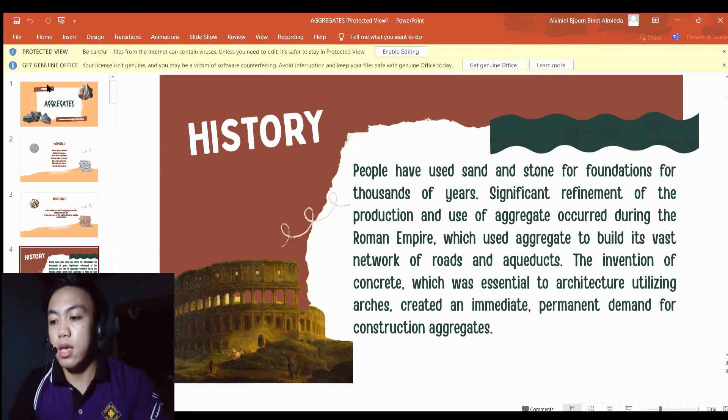Aggregates have been around since before humans walked the earth, formed in the fires of volcanoes and molded by erosion, time, water, and glaciers. The Romans were excellent engineers and used rock and concrete in almost everything they built, from aqueducts and bridges to roads and buildings that are still standing today. In almost every country in the world, you can find ancient structures that used some form of aggregates.

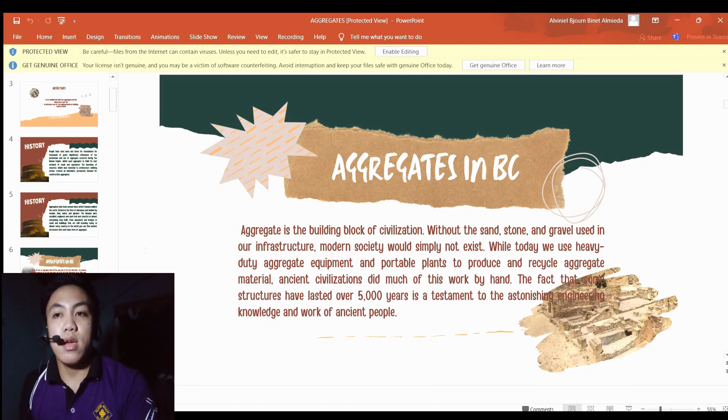Early signs of aggregate use. Some of the earliest signs of aggregate in use are from Mesopotamia around 3000 BCE. Ancient Mesopotamians built houses made of strong stone with simple concrete floors and even underground waterproof systems. This was one of the reasons they were able to thrive in the hot desert climate. Some of these structures have survived to these days.

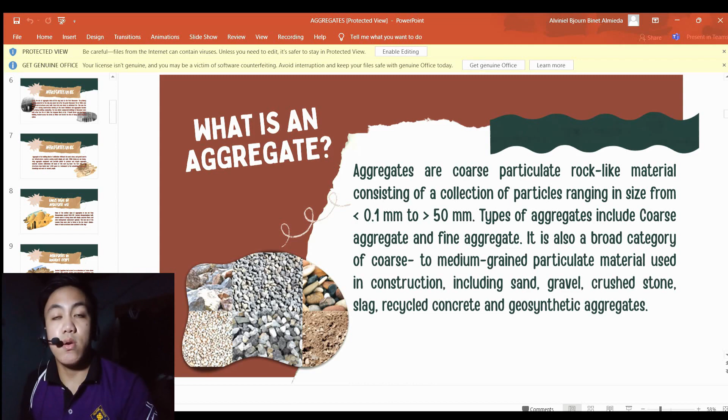Aggregates are a component of composite materials such as concrete and asphalt. The aggregate serves as the reinforcement to add strength to the overall composite material, along with the water and Portland cement that are essential ingredients in concrete.

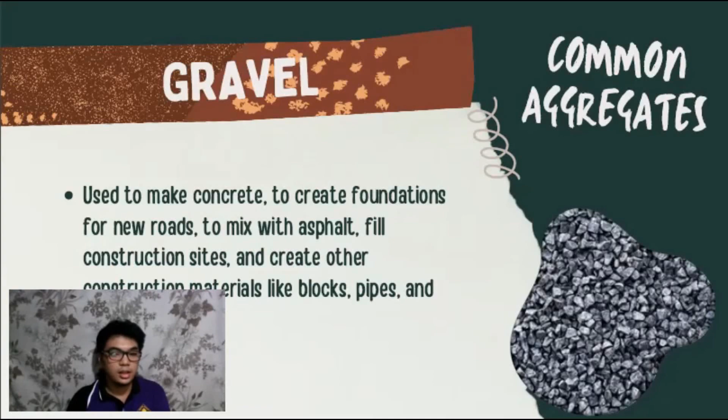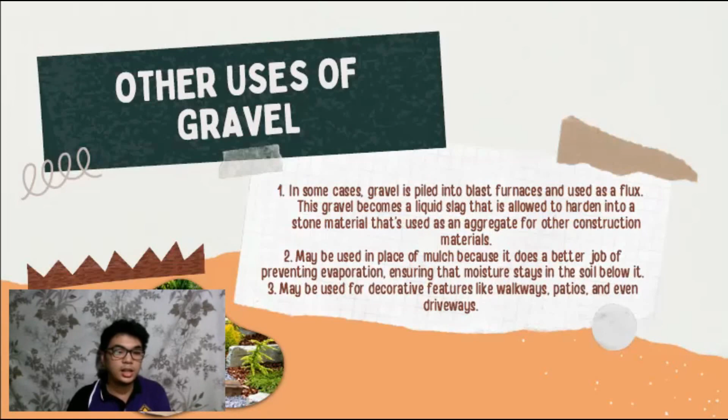So, other uses for gravel: minsan ang gravel ay tinutunaw tapos papatigasin uli, yun yung gagamitin na aggregate sa construction. Pwede din na yung nilalatag sa lupa kasi nakukulong niya yung moisture sa ilalim niya, o minsan pampaganda lang talaga ng bakuran. Tapos sunod naman ay buhangin.

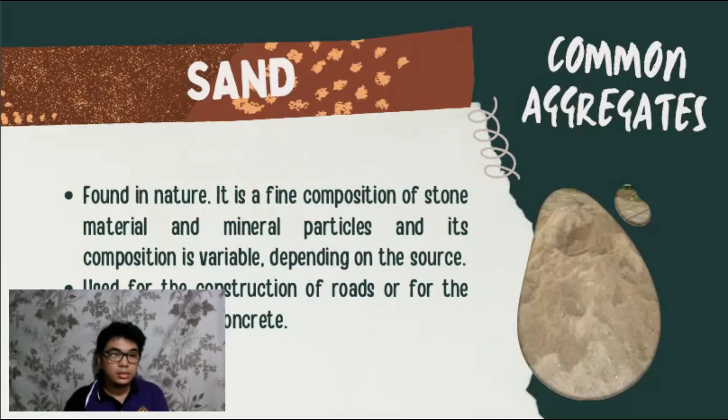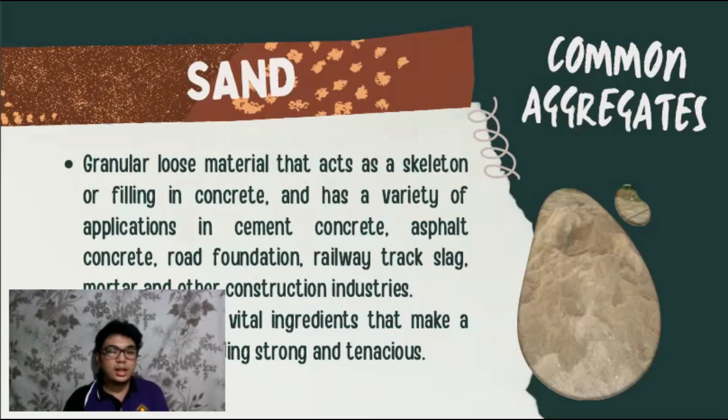Ang buhangin, makikita natin siya sa paligid. Gawa siya sa mga maliliit na bato-bato dun sa lugar kung saan siya na-form. Ginagamit siya sa construction at paggawa ng concrete. Isa siya sa mga pinakamahalagang bagay sa construction, pwede gamitin sa kung ano-anong klaseng mga project. Siya din daw ay nag-a-act as skeleton o filling ng concrete.

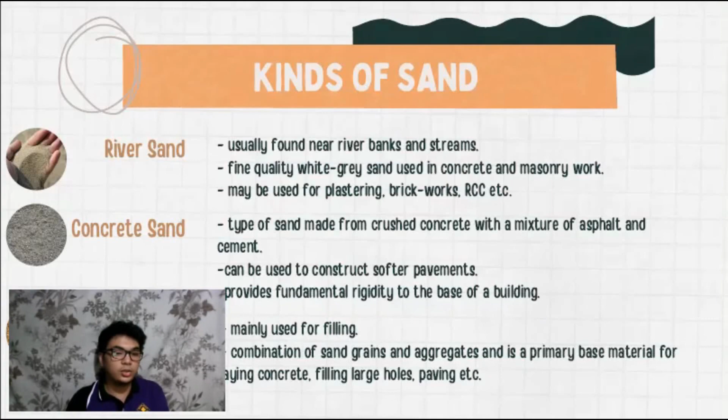Tapos fill sand, yung combination siya ng mga fine aggregates, mga bato o lupa na dinurog hanggang maging pino. Tapos yung coarse sand naman, yung buhangin na medyo may kalakihan kumpara sa ibang mga kinds ng sand, yung size ng grains niya. Utility sand, yun yung parang iba-iba yung kulay ng grains, tapos medyo may kalakihan din yung size ng grains niya.

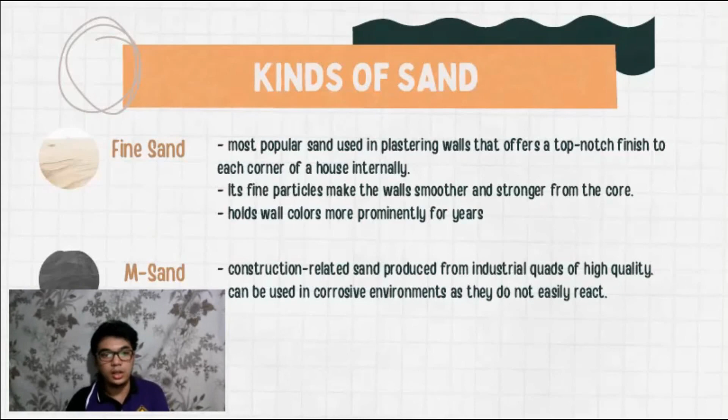Tapos pit sand naman, madalas ginagamit sa building kasi maganda yung binding property niya, red-orange yung kulay niya. Tapos fine sand, ginagamit siya sa pangpalitada kasi sobrang pino ng grains niya, nagiging sobrang smooth ng surface, gano'n. Tapos M sand, ibig sabihin lang yan ay manufactured sand, yun, galing sa mga factory, gano'n.

Tapos sunod naman, lightweight aggregates. Ito naman, nasa pangalan na niya, yung mga aggregate na mas magaan pa kaysa sa ibang mga aggregates, gano'n. Pero di naman ibig sabihin nun, di na ganun katibay yung mga gawa sa LWA, kasi ang LWA ay ginagamit pang gawa ng mga high strength concretes.

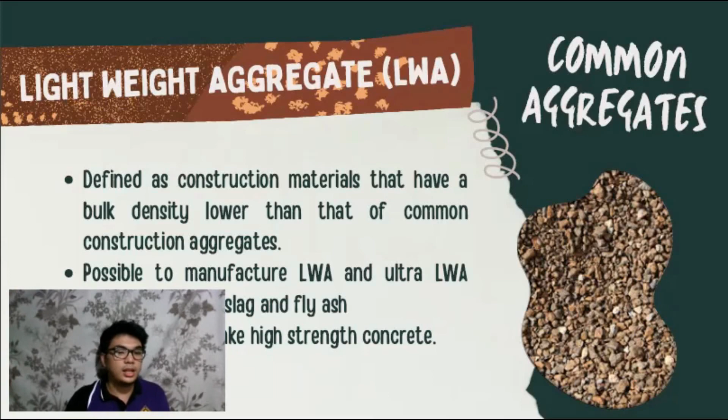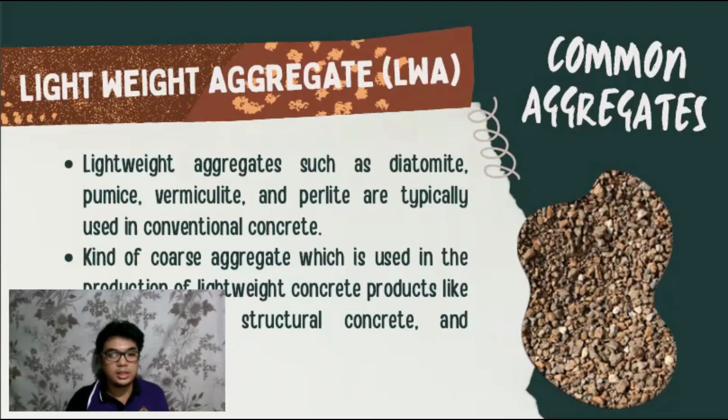Tapos merong mga natural aggregate na magaan talaga, pero pwede mo din siya gawin mula sa slag o kaya fly ash. Tapos ginagamit syempre sa paggawa ng lightweight concrete products. Tapos kalimitang ginagamit na LWA ay diatomite, pumice, vermiculite at saka perlite.

Tapos ito, types of LWA. Una is industrial waste LWA, yun yung mga gawa sa fly ash, slag ball, cinder, light sand, natural. Tapos natural LWA naman is yung mga kagaya nung diatomite, pumice, vermiculite, tsaka perlite.

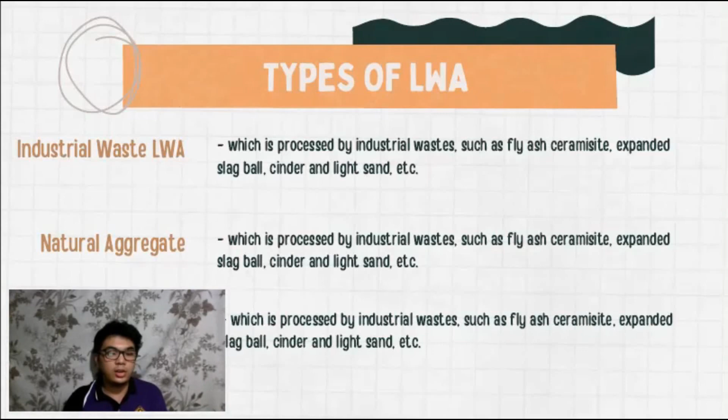Tapos artificial LWA, yun yung mga gawa sa local materials, parang mga minsan clay, ganun. Tapos sunod, recycled concrete aggregates or RCA. Ang RCA ay gawa sa mga concrete na dinurog mula sa demolition projects, mga nirecycle nga. O kaya pagka merong mga binabago sa building, tapos merong mga tinitibag, yun, dun siya gawa.

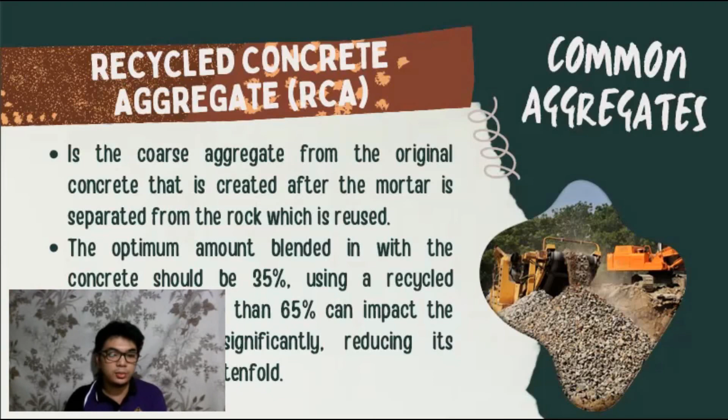Kasi, yung mga dinudurog na mga concrete sa mga dinemolish na building, sinasala pa, inaalis yung mortar, tapos yung mga bato na makukuha nila, yun yung pwedeng gawing RCA. Tapos ang pinaka-optimal lang daw na ilagay na RCA sa mixture ay 35%. Pag lumabas kasi sa 65% yung volume ng RCA sa mixture mo, pwede magpahina ng sobra sa concrete.

Tapos ayun, sunod naman, benefits ng RCA. Syempre dahil recycled, mas pinapamura niya yung cost ng construction. Tapos mas papababa niya yung environmental impact kasi di na nga natin kailangang itapon kung saan man yung mga natibag nating concrete. Tapos dahil doon, mas mape-preserve natin yung mga natural resources, mas makatipid tayo. Mas makabawas din sa space na gagamitin para sa landfill.

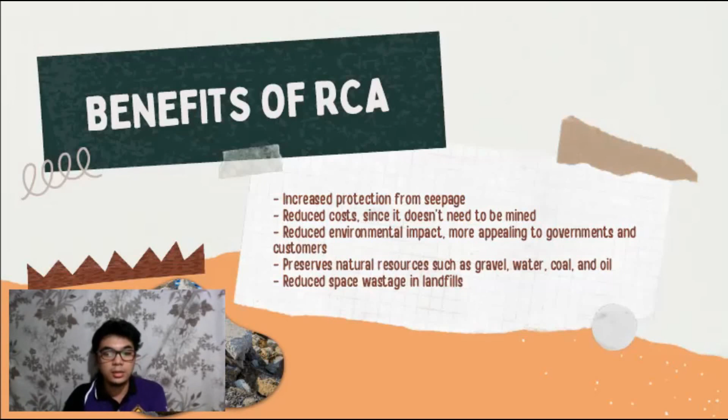Tapos yung risks naman, gaya na sabi kanina, kapag sumobra ang gamit natin ng RCA, pwedeng makabawas sa structural integrity. Magkakaroon siya ng cracks agad, ganon. Tapos di din siya, dapat lagi din siya nire-refine, kasi pwedeng yung mga ma-recycle natin, mga brittle na aggregate, magkakaroon yun ng uneven grading pag ganon.

Tapos kailangan din daw, pag gagamit ng RCA, dadagdagan pa ng supplement yung mix para maging kasing tibay siya ng parang gumamit ka lang ng normal na aggregate. Tapos syempre, pag nagre-refine, kailangan mong bantayan yun para sure ka na yung mga magagamit na RCA ay okay, ganun.

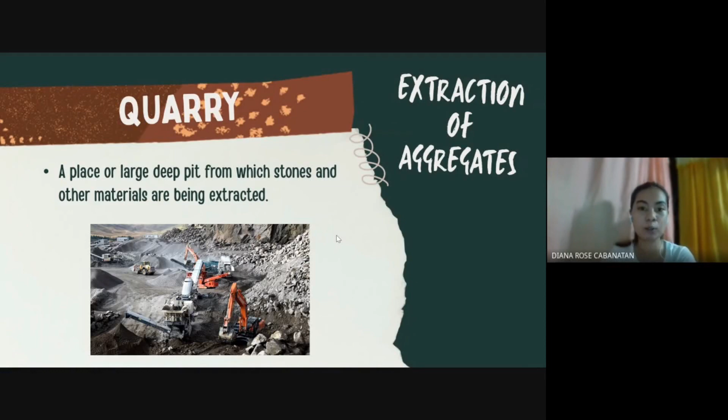Bago ko simulan yung pagre-report, kailangan muna natin i-define kung ano nga ba yung quarry. It is a place or large deep pit from which stones and other materials are being extracted. So ayun, yung mga aggregates nga, yung mga bato, yung mga sand and gravel, sa quarry nga daw po nakukuha yun. Next, how a rock quarry works.

Dito malalaman natin kung paano kinukuha yung mga rocks tapos kung anong process nila.

Rock quarries usually operate for at least 30 years and are developed in distinct benches or steps. A controlled explosion is normally used to release the rock from the working face. It is then transported by truck or conveyor to a crusher, where it goes through a series of crushing and screening stages to produce a range of final sizes to suit customers' needs.

Sa rock quarries, nagpapasabog sila ng controlled lang naman para magkapira-piraso yung mga rocks. Sa rock quarries kasi yung place niya puro bato-bato, yung mga malalaking bato, kaya kailangan nilang magpasabog para maging mas pira-piraso yung mga rocks.

Tapos, yung excavator, hinahakot nila yon tapos nilalagay sa isang truck. Tapos yung truck naman, dinedeliver nila sa planta. Tapos ilalagay sa crusher. Tapos doon na nila ini-screen, nililinis para mabenta sa market.

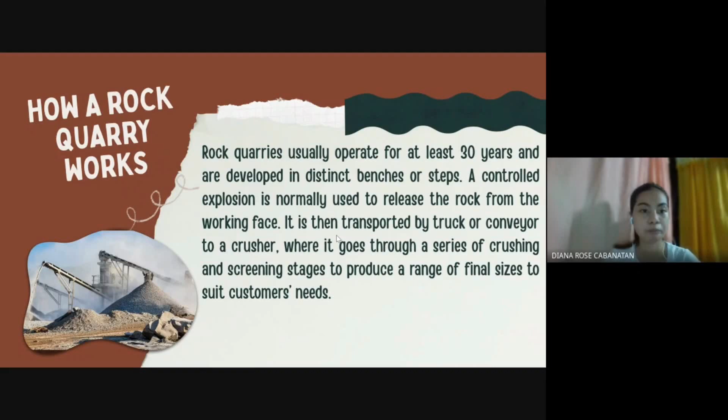Ano nga ba yung crushing? Powerful hammers or metal jaws within the primary crusher break the rock down. Rock passes through a series of screens that sift it into different sizes. It may also pass through further crushing stages. Yung pagka-crush ng rock, may 3 stages yan.

Unang stage ay yung primary crushing. Yung mga rocks doon, nire-reduce yung sizes and shape nila para ma-handle ng secondary crushing.

Sa secondary crushing naman, nire-reduce nila into standard sizes para yung mga binibenta sa market ganun. Binabawasan nila sa ganung size.

Tapos yung final reduction crushing naman, parang pinapolish na lang nila yung rock kung tama ba yung mga sizes na nakuha sa secondary crushing. Tapos dinedeliver na sa market para mabenta.

Next, kung kanina sinabi ko yung process ng rocks kung paano siya pinoproseso, dito naman aalamin natin kung paano yung pagproproseso ng sand tsaka gravel. How sand and gravel quarry works: sand and gravel quarries are much shallower than rock quarries and are usually worked and restored in progressive phases.

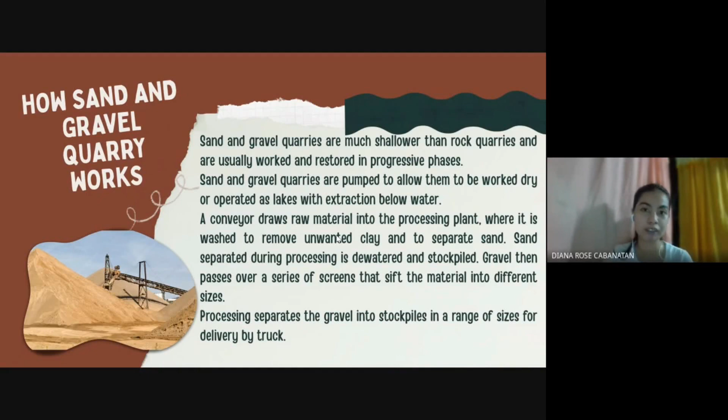Next, yung marine aggregates naman. Kung kanina, rock yung pinag-usapan natin, tapos sand and gravel quarries. Dito naman, marine aggregates. Kailangan muna natin i-define kung ano nga ba yung marine aggregates.

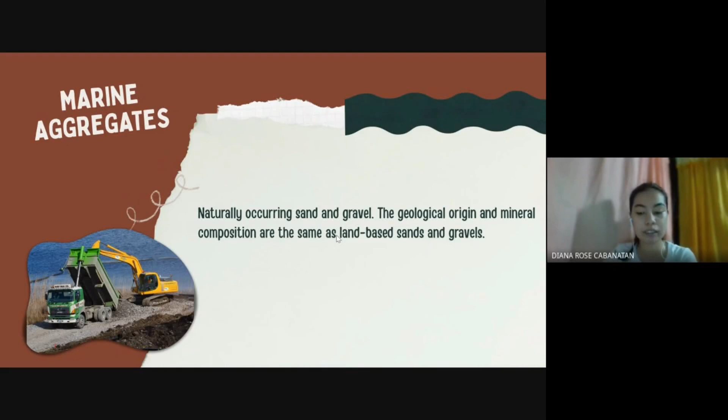Marine aggregates is naturally occurring sand and gravel. The geological origin and mineral composition are the same as land-based sand and gravel. Kapareho lang din siya ng sand and gravel na nakikita natin, sinabi ko kanina, nakikita sa seabed, sa river, sa lake.

Ano nga ba napaprocess yung marine aggregates? Saan nga ba ito nakukuha? At paano nakukuha? A significant proportion of the demand for aggregates is satisfied from river, lake, and seabeds. Our marine resources are an increasingly important alternative source of aggregates.

Marine aggregates play an important role in replenishing beaches and protecting coastline from erosion. Kanina, na-discuss ko na yung sand and gravel quarry ay madalas nasa river sila, nasa lake, nasa seabed. Ang downside kasi nun, parang nakakalbo yung mga sand doon, pumapangit yung mga beaches natin.

Tapos, pag umulan ng malakas, madalas kasi bumabaha doon.

So, nag-isip sila ng alternative para magkaroon pa ng sand and gravel. Ang naisip nila, marine aggregates. Kumukuha sila ng aggregates sa ilalim ng dagat.

Sinabi dito sa pangalawang paragraph kung paano nakukuha yung marine aggregates. Pag nasa dredging area na sila, kung saan kumukuha ng sand and gravel gamit ang satellite navigation, binababa nila yung pipe hanggang makarating sa sand ng dagat. Kapag nakarating na, magpo-forward or backward yung vessel habang hinihigop ng pipe yung sand and gravel papunta sa lalagyan ng vessel hanggang sa mapuno ito.

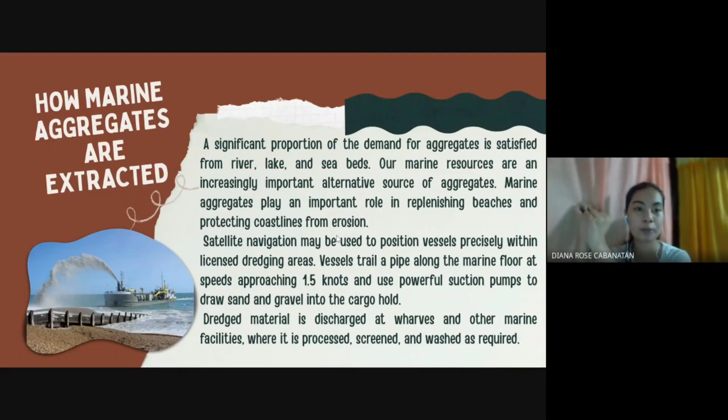This is the second part of our report. Sa first part, diniscuss yung history of aggregates, in-explain kung ano yung aggregates at yung mga common types na ginagamit, at yung extraction of aggregates. So here, sa second part, we will be discussing the classification of aggregates based on its shape and size, the properties of aggregates, and the list of test methods for concrete aggregates.

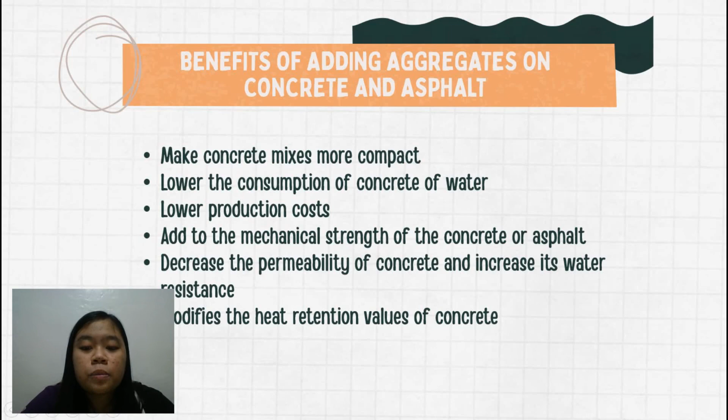Before tayo mag-proceed, padaanan muna uli natin tong benefits or importance of adding aggregates on concrete and asphalt, since na-discuss na rin naman siya sa first part. Adding aggregates on concrete and asphalt makes the concrete mixes more compact, and aggregates lower the consumption of water as well as the production cost. Aggregates add to the mechanical strength of the concrete or asphalt, decrease the permeability of concrete, increase its water resistance, and modify the heat retention values of concrete.

Classification of aggregates based on its shape. Meron tayong 6 dito: rounded aggregates, irregular or partly rounded aggregates, angular aggregates, flaky aggregates, elongated aggregates, and the last one is flaky and elongated aggregates. First one is rounded aggregates.

Rounded aggregates are naturally occurring aggregate, and they are fully water-worn or completely shaped by attrition. Kapag sinabing attrition, yung mga bato sa ilog o sa river, when they knock against each other, they break apart, and nagiging mas maliit sila and nagiging more round.

Rounded aggregates are the main factor behind the workability. Itong workability, ito yung term na ginagamit to describe how easily freshly mixed concrete can be placed or mixed, kung gaano siya kadali mahalo. Ito rin yung property na directly impacts the strength, quality, and appearance of concrete. So rounded aggregates yung main factor behind the workability.

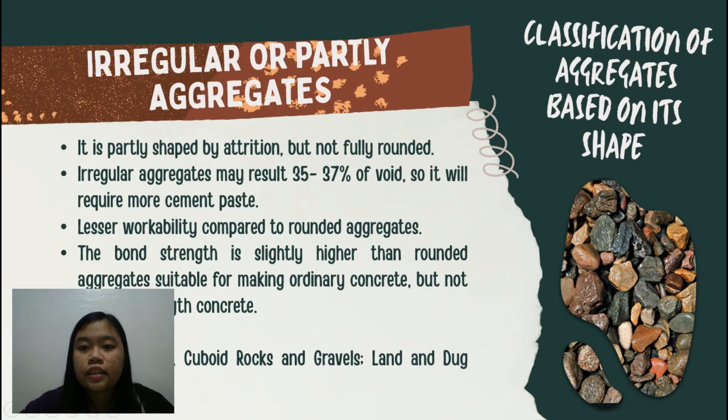Third one, angular aggregates. Angular aggregates consist of well-defined edges formed at the intersection of roughly planar surfaces. Ito yung karaniwan nating nakikita, yung may medyo matulis na mga bato-bato. Angular aggregates are obtained by crushing the rocks, unlike sa mga nauna na na-form by attrition.

Angular aggregates result in maximum percentage of voids, from 38 to 45%. Kung yung rounded aggregates ang may minimum percentage of voids, ito naman ang may maximum percentage. Siya yung nagbibigay ng less workability compared sa dalawang nauna. Pero kahit ganon, they give 10 to 20% more compressive strength due to development of stronger aggregate mortar bonds. Ito na yung ginagamit for manufacturing high-strength concrete. Example: crushed rocks of all types.

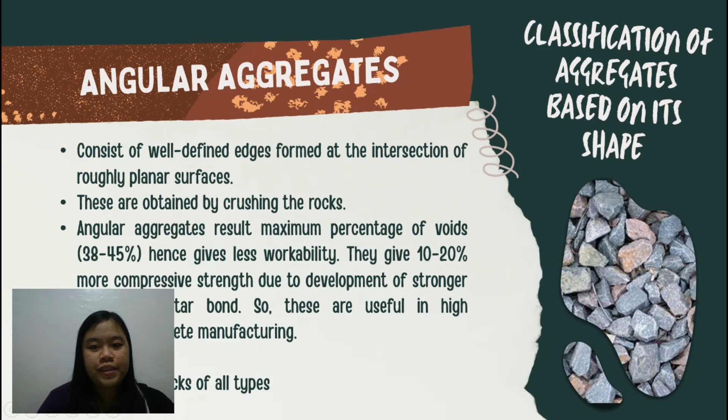Next is the flaky aggregates. When the aggregate thickness is small compared with width and length of that aggregate, it is said to be flaky aggregate. Or, when the least dimension of aggregate is less than 60% of its mean dimension, it is said to be flaky aggregates. Tawag dito sa flaky aggregates yung mas manipis siya compare sa mga naunang nabanggit. Flaky aggregates increase the surface area in a concrete mix, so magre-require siya ng more cement paste. Example: laminated rocks, both naturally occurring as well as crushed.

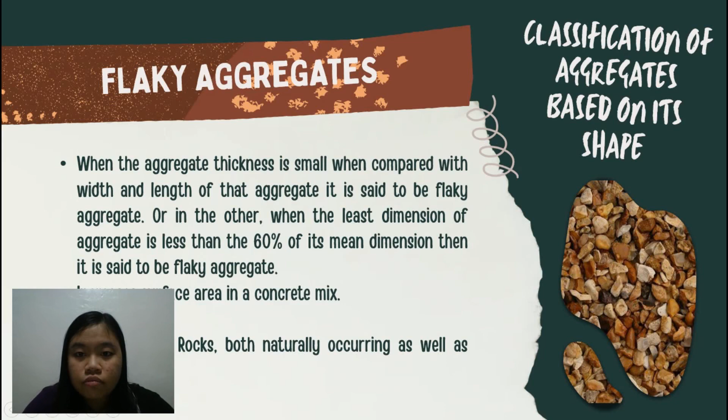So, elongated aggregates. Elongated aggregates are longer than they are thick or wide. So, when the length of aggregate is larger than the other two dimensions, then it is called elongated aggregate, or the length of aggregate is greater than 180% of its mean dimension.

So, like flaky aggregates, it also adds more surface area to the mix. So, more cement paste is needed when this is used.

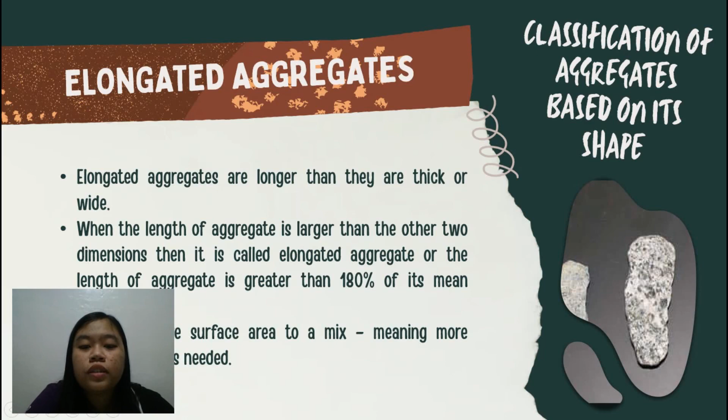So, last one, flaky and elongated aggregates. When the aggregate length is larger than its width and width is larger than its thickness, then it is said to be flaky and elongated aggregate. It's a mix of the two, a mix of the previous two, and it is the least efficient form of aggregate with regards to workability.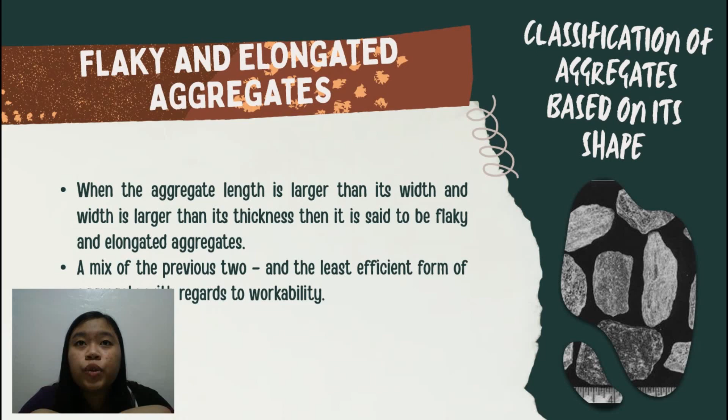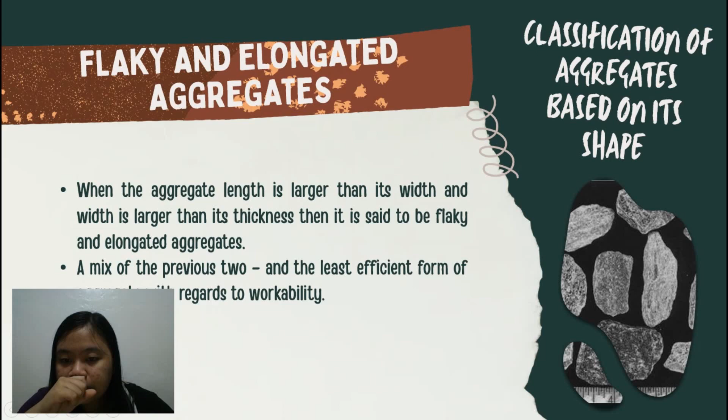So, because of that, the bond between them is stronger compared to rounded aggregate, but the percentage of void is higher. The above three types of aggregates are not suitable for concrete mixing. These are generally obtained from poorly crushed rocks.

The shape and texture of aggregate affects the properties of fresh concrete more than hardened concrete. So, concrete is more workable when smooth and rounded aggregate is used instead of rough, angular, or elongated aggregate. So, smooth and rounded aggregates have higher workability compared to rough, angular, or elongated aggregate.

Most natural sands and gravel from riverbeds or seashores are smooth and rounded and are excellent aggregates. Crushed stone produces much more angular and elongated aggregates, which have a higher surface to volume ratio, giving better bond characteristics but requiring more cement paste to produce a workable mixture.

The surface texture of aggregate can be either smooth or rough. A smooth surface can improve the workability, as mentioned earlier, and yet a rougher surface generates a stronger bond between the paste and the aggregate, creating a higher strength.

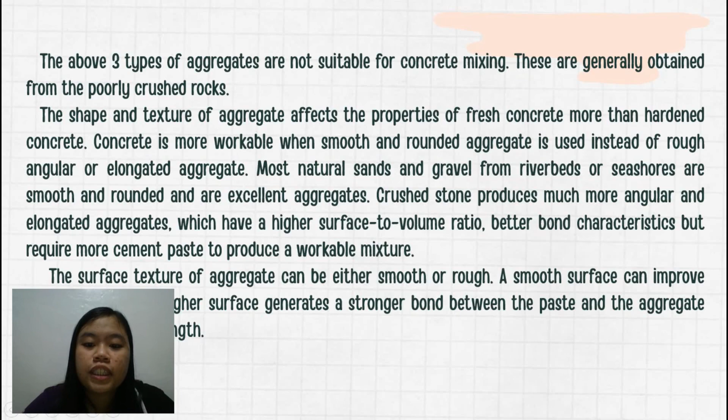So, next is the classification of aggregates based on its size. This will be presented by Ben Joshua Mercado. Thank you.

Good morning. I am Ben Joshua Mercado. I will be reporting on the classification of aggregates based on its size. Aggregates are available in nature in different sizes. The size of aggregate used may be related to the mix proportions, type of work, and etc. The size distribution of aggregate is called grading of aggregates.

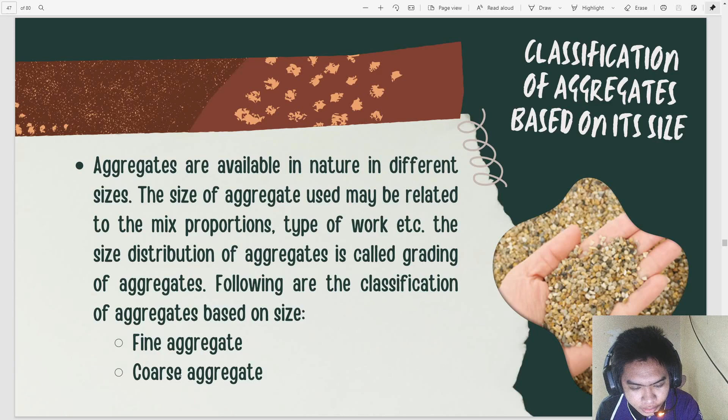Following are the classification of aggregates based on size. Fine aggregate, we call it sand, the small particles of materials. And then coarse aggregate, this is stone.

Next is the scope of fine aggregates and coarse aggregates. Definition of fine aggregate: small size filler materials in construction. Coarse aggregate: larger size filler materials in construction. Size of particles of fine aggregates are the particles that pass through a 4.75 mm sieve and retain on a 0.075 mm sieve. This is how big the hole of the sieve is, 4.75.

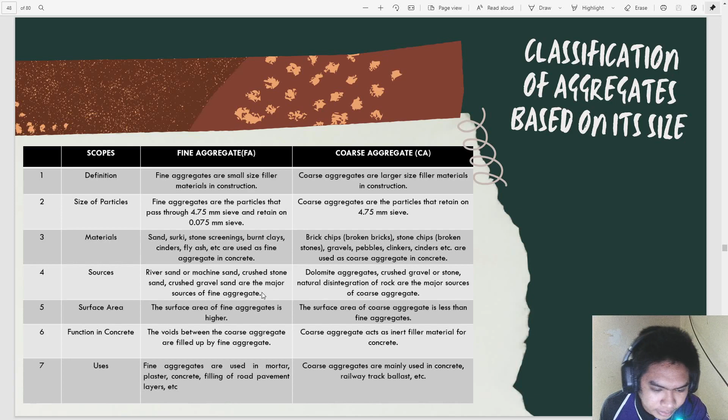Surface area ng fine aggregate is higher kaysa sa coarse aggregate. Function ng fine aggregate sa concrete, voids between the coarse aggregate are filled by fine aggregates. And then coarse aggregate acts as inert filler material for concrete.

Uses naman nito, fine aggregate are used in mortar, plaster, concrete, filling of road, pavement, layer, etc. And sa coarse aggregate are mainly used in concrete, railway track ballast, and etc.

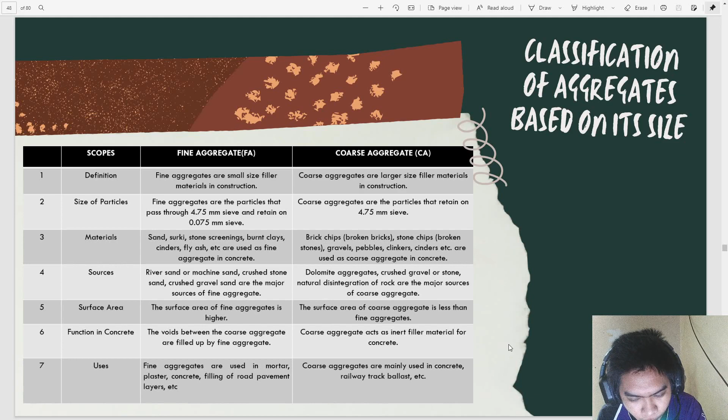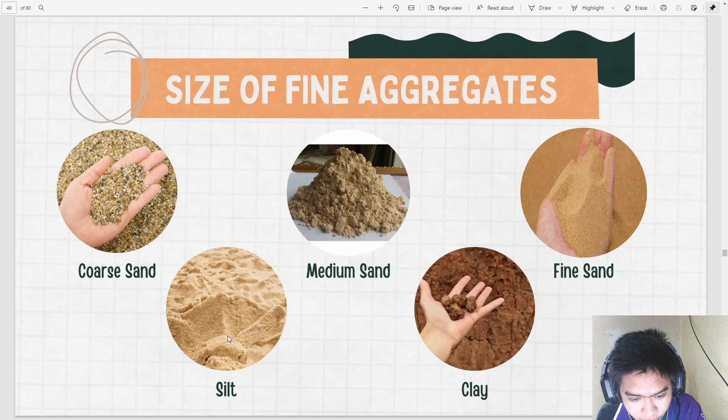Next, makikita natin ang size of fine aggregates. Coarse sand, ganito kalalaki yung butil, parang bigas. And then medium sand, and then fine sand na mas maliliit kaysa dun sa medium. And then next yung silt, at saka yung clay.

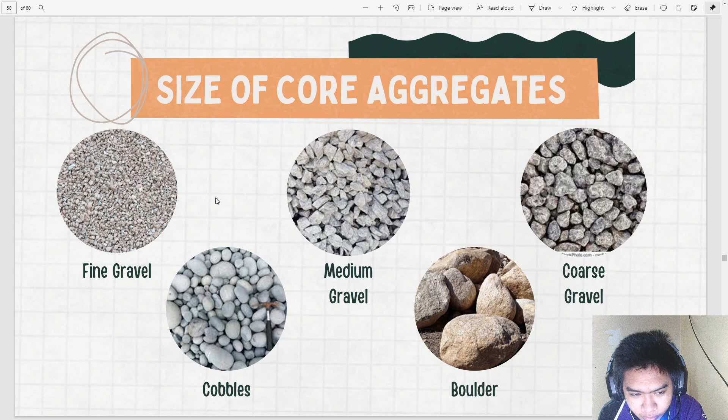Next, properties of aggregates. The aggregates are used as important ingredient in the preparation of concrete. The fine aggregates are used in concrete as fillers, and the coarse aggregate gives the compressive strength to concrete.

Makikita nga natin ang fine aggregates na ginagamit sa concrete as filler, and then coarse naman nagbibigay ng compressive strength to concrete. But there are properties or characteristics of aggregate which influence the properties of resulting concrete mix.

First, specific gravity. The specific gravity of aggregate is calculated by ratio between the weight of aggregates to the weight of water, which equals to aggregate weight. The high specific gravity of aggregate contains good quality, and at the same time low specific gravity aggregates are weak and permeable.

Normally, the specific gravity value of aggregate lies between 2 to 3, which is used in construction works. The specific gravity value shows the quality and the strength of the materials. Ang value nito ay nagpapakita ng quality and strength of the materials.

Makikita dito sa picture na ito yung formula ng specific gravity. May ASTM bulk specific gravity, SSD bulk specific gravity, at apparent specific gravity.

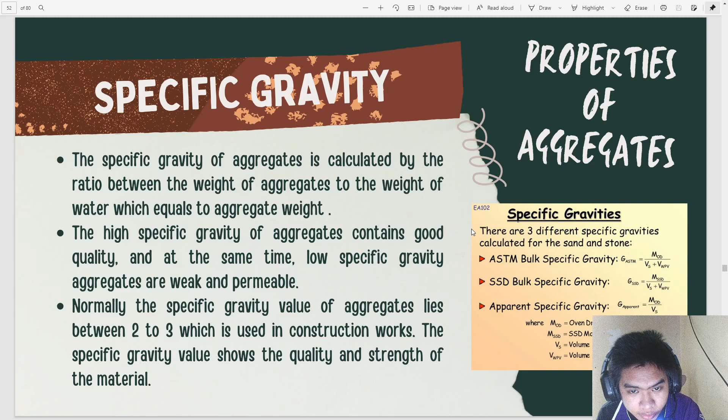Next, bulkage of aggregates. Volume of aggregates will change when it's subjected to moisture, called bulkage. When the moisture content is present in the sand, it forms a thin film around each particle that makes adjacent particles push a little way from them. This change makes the overall volume of the sand increase.

The bulking of sand is in the range between 20% to 30%. For the coarse aggregate, it is minimal. Bulk density is the ratio between dry weight of aggregates to saturated weight of aggregates in kilogram per liter.

Makikita nga natin dito sa pagkakaroon ng moisture, sa bulking ng sand ay nag-range siya sa 20 to 30%, at sa coarse naman, coarse aggregate is minimal.

Sample nito yung buhangin. Pag nalagyan ng tubig, makikita natin na mamasa-masa, parang lumalaki yung volume ng sand. At sa coarse aggregate naman, hindi naman siya permeable katulad ng bato na pag nilagyan ng tubig, hindi lumalaki yung size ng stone.

And then the bulk density of aggregate is dependent on the compaction grading of aggregates in concrete. Kaya makikita nga natin dito sa picture, sa table na ito, yung pag-decrease ng volume of sand at yung pagtaas ng moisture content of the sand.

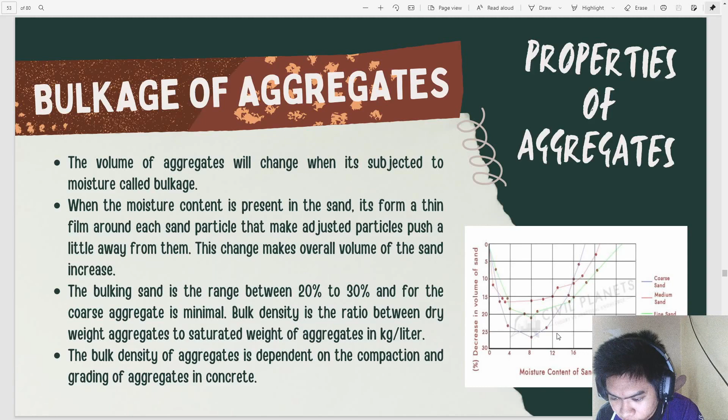Makikita natin dito yung tatlong klase ng fine aggregates na nasa graph. And next, voids.

The presence of space between aggregate particles is called void. The saturated aggregates volume will change due to the presence of voids. Dito makikita natin sa picture yung voids nga daw, ito yung spaces between aggregates.

Makikita natin dito sa poorly graded, malalaking spaces siya, walang nakalagay. Dito naman sa well graded, may mga maliliit pang aggregates dun sa malalaki. Parang sample nito, itong malaking bilog, yung coarse aggregate.

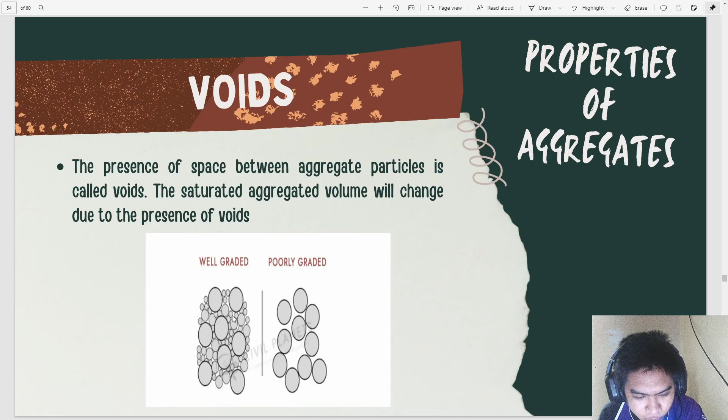At yung mga maliliit naman, ito yung mga fine aggregates na filler siya doon sa may coarse aggregate.

Next, gradation and specification ng aggregates. Gradation is the distribution of different size stone comprising aggregates by percent of weight. Gradation is determined by filtering an aggregate through successively smaller sieves and measuring the weight retained on each sieve.

Fine content, negative 200 sieve or smaller than 0.003 inches, is determined by washing the aggregates to separate these fine materials from the larger pieces.

Makikita natin dito sa picture na ito na yung malalaking parts ng coarse aggregates ay matitira sa may taas, and then yung mga fine aggregates na maliliit ay mapupunta sa baba. Bali maseseparate yung dalawang sizes ng aggregates.

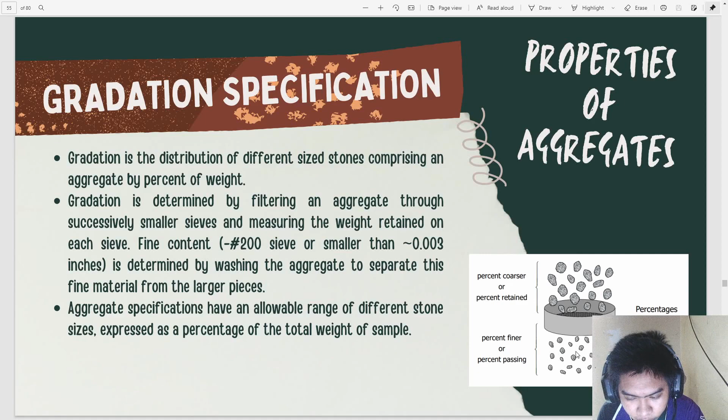So for the next property of aggregates is the composition. It is important to identify or determine the composition of the aggregate because, as we know, aggregates contain different chemical particles that may react with the cement, and this results in the formation of cracks on the concrete surface. So it is important that we test the composition of aggregate to ensure that such kinds of particles are not present in the aggregates.

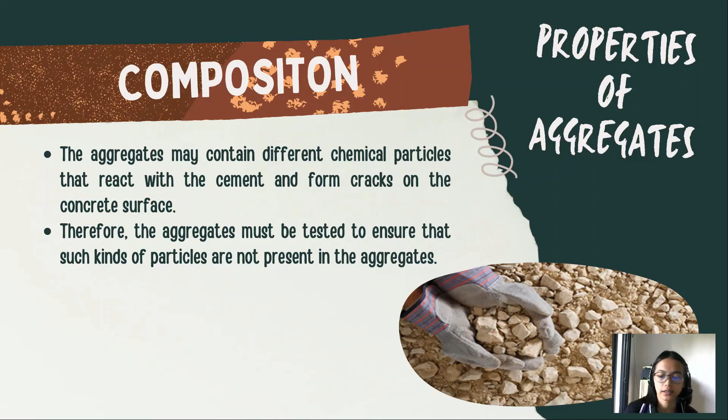Next property is size and shape. The size and shape of the aggregates impact the strength and durability of the concrete. When we use large size aggregates, this affects the workability of concrete. Therefore, the maximum aggregates that we must use should not be less than 20 millimeters in reinforced concrete. And we must use the largest coarse aggregates viable for the structure in preparation of economical concrete mix.

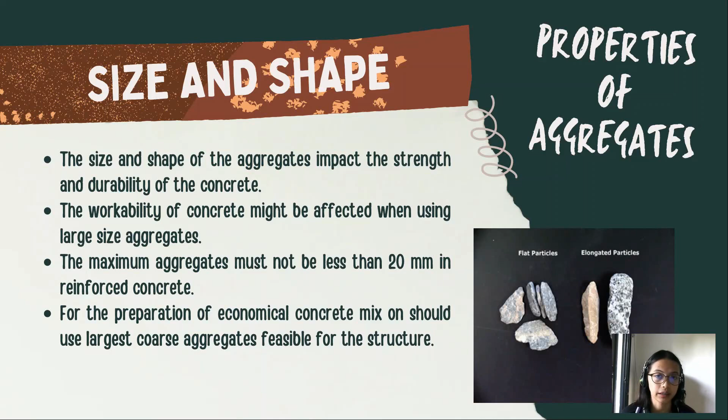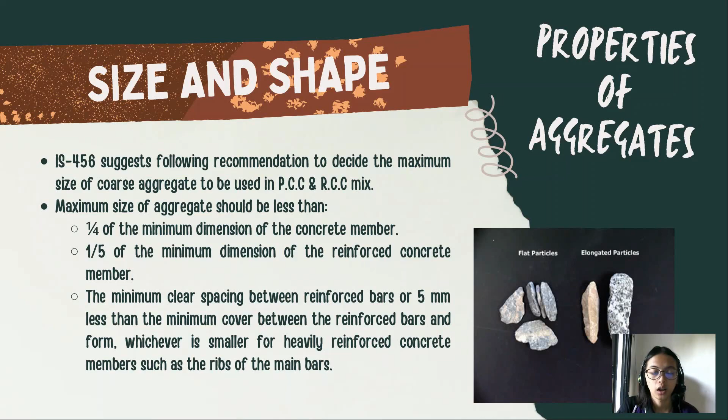Indian Standard Code suggests the following recommendation to decide the maximum size of coarse aggregate to be used in plain cement concrete and reinforced cement concrete mix. The maximum size of aggregate should be less than 1/4 of the minimum dimension of the concrete member, 1/5 of the minimum dimension of the reinforced concrete member, and the minimum clear spacing between reinforced bars, or 5 mm less than the minimum cover between the reinforced bars and form, whichever is smaller, for heavily reinforced concrete members such as the ribs of the main bars.

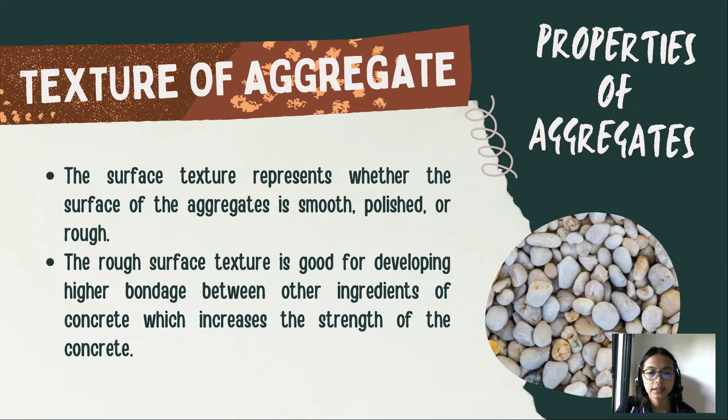Next property is the texture of the aggregate. The surface texture of the aggregate can either be smooth, polished, or rough. The rough surface texture of the aggregate is good for developing higher bonding between other ingredients of concrete, and this increases the strength of the concrete.

Next one is the porosity and absorption. Porosity is the formation of pores in the rocks. Pores form in rocks due to air bubbles, so we have porous rocks which contain pores. For water absorption, it is defined as the difference between the weight of very dry aggregates and the weight of the saturated aggregates with surface dry conditions.

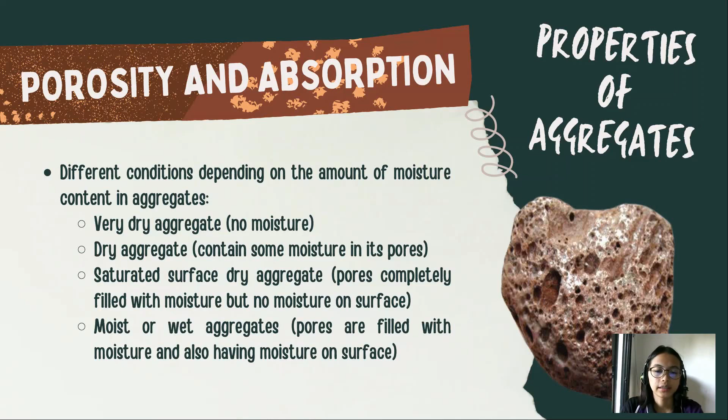We have different conditions depending on the amount of moisture content in aggregates. Number one, very dry aggregate, meaning it has no moisture at all. Number two, dry aggregate, which contains some moisture in its pores. Saturated surface dry aggregate is when the pores are completely filled with moisture, but the surface has no moisture at all. And we have moist or wet aggregates, where both pores and surface are filled with moisture.

For the fineness of aggregates, this is another property of aggregate. Fineness denotes the particle size of the aggregates. A high fineness value means the aggregate is coarser, and a low fineness value means the aggregate is finer. If we use a more fine aggregate, or the aggregate has a very high fineness value, it may form cracks on the concrete. So to test the fineness of the aggregate, we use the sieve analysis test.

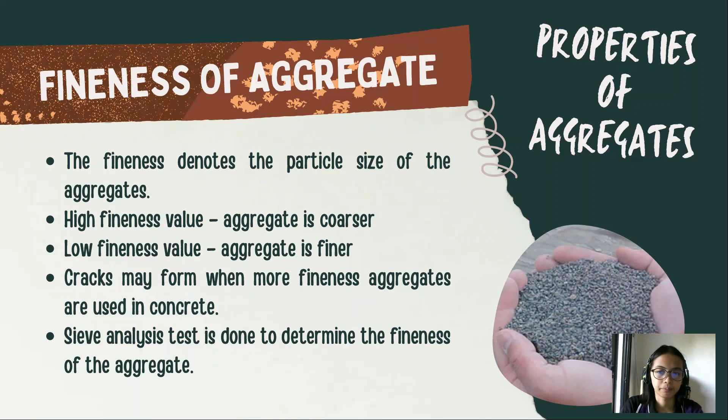And the next one is the surface area of aggregates. The surface area of fine aggregate is higher than the surface area of coarse aggregate. So the specific surface increases with the reduction in the size of aggregate particle. Specific surface area is the surface area per unit weight of the aggregate.

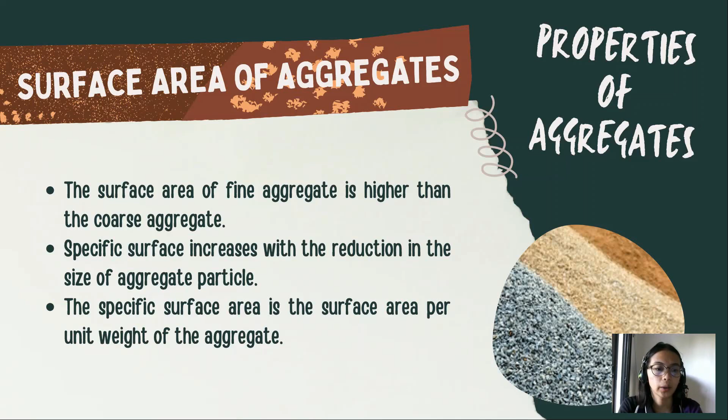Next one is the deleterious material. It affects the bondage of the concrete ingredients, resulting in reduced strength and durability of the concrete. Deleterious materials may cause one of the following effects: number 1, to interfere with hydration of cement; number 2, to prevent development of proper bond; number 3, to reduce strength and durability; and number 4, to modify setting times.

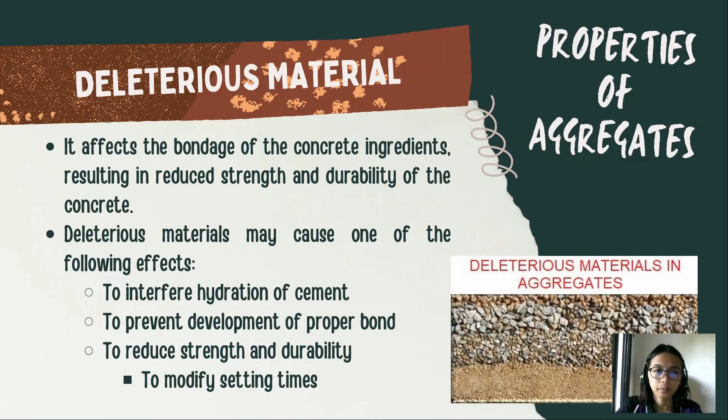Next property is the crushing value of aggregates. Crushing value of aggregates gives a relative measure of resistance of an aggregate to crushing under gradually applied compressive load. It is helpful to determine the crushing value of the aggregate to find the compressive strength of it, and it determines whether it is suitable for concrete work or not.

Next one is the impact value of aggregates. This is used to find the resistance capacity of aggregate from sudden impact applied on the aggregate. To determine the impact value of the aggregate, we use this impact machine. We put the test sample on the cylinder test cup, then a tamping rod is placed above the cylinder cup, and the tamping rod crushes the sample. So we measure the before and after weight of the sample using the weight balance.

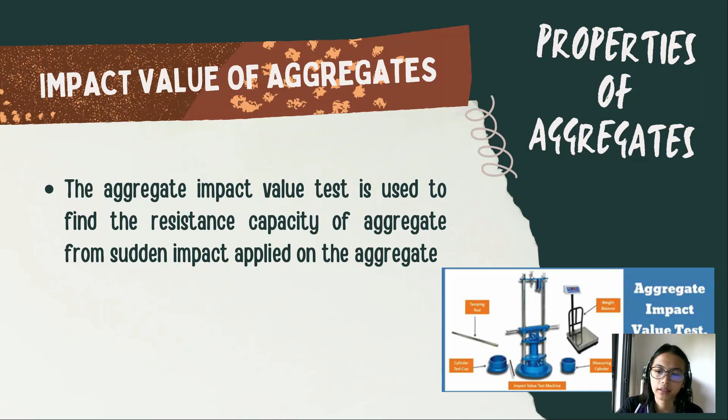Next one is the abrasion value of aggregates. Abrasion value of aggregates measures the resistance of the aggregate to wear when it is rotated in a cylinder along with the abrasive charge. As you can see here in the picture, we have the Los Angeles machine. This machine produces abrasive action using a standard steel ball, which is mixed with the aggregate and spun in a drum in a specified time and specific number of revolutions. After the procedure is done, we determine the percentage of wear of the sample aggregate due to friction with the steel balls. This value is called the Los Angeles abrasion value.

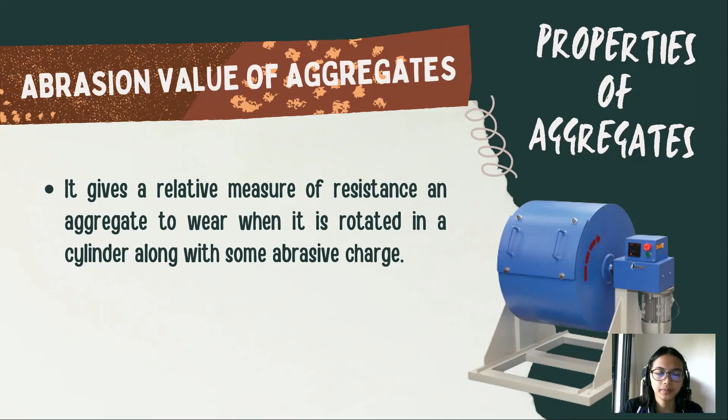List of test methods for concrete aggregates. Grading or sieve analysis: this test determines the particle size distribution of fine and coarse aggregates.

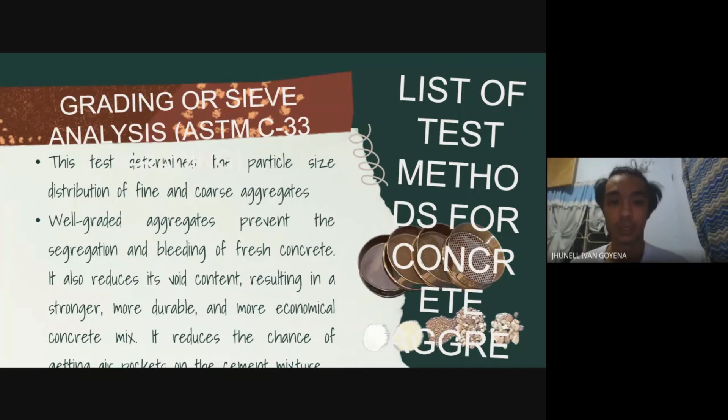Materials finer than 75 micrometer sieve. Determination of quantity of materials finer than the 75 micrometer (No. 200) sieve, which may be composed of clay particles and clay coating.

Excessive amounts of materials will result in poor bonding between aggregates and cement paste. Foreign elements may deteriorate the bond between elements present in the concrete mix. The sieve with finer texture of 75 micrometer filters out mostly clay particles or clay coatings. We know that clay, when dry, becomes very brittle and crumbles easily. If your concrete mix has clay present, as it dries, it will shrink and cause damage because the bond of the concrete mix is not good when clay particles are present in the mixture. That's why we use a fine sieve to remove those clay particles.

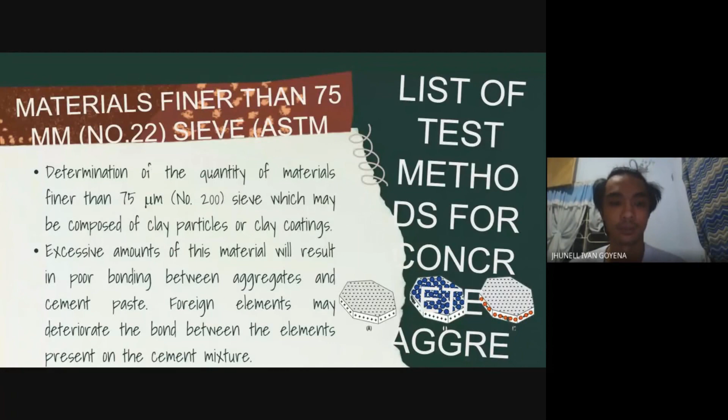Next, standard specification: for fine aggregates, 3% max for structural and pavement concrete, 5% max for all other concretes. This is the maximum amount of clay particles or clay coating allowed by standard. For example, in structural or pavement concrete, only 3% maximum clay content should be present. For manufactured sand, it's 5% and 7% respectively. Manufactured sand naturally has more clay, but since its quality is good for use in concrete mix, the clay present doesn't significantly affect it.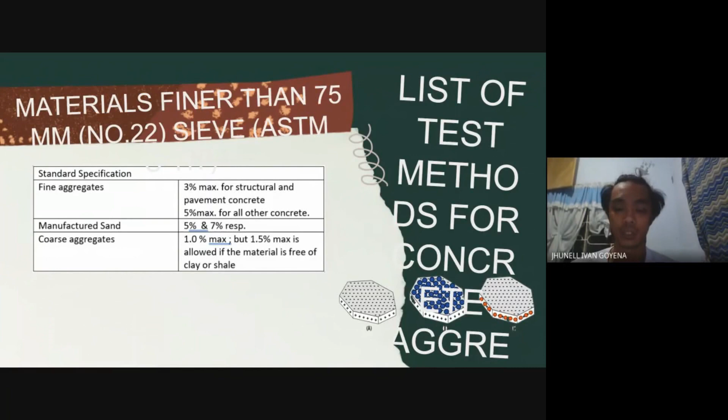For coarse aggregates, 1% maximum, but 1.5% maximum is allowed if the material is free of clay or shale. The 1% maximum clay content, or 1.5% if clay-free, applies to coarse aggregates because clay is filtered out at the 75 millimeter sieve. So the coarse sieve will drop out those particles, and they won't be included.

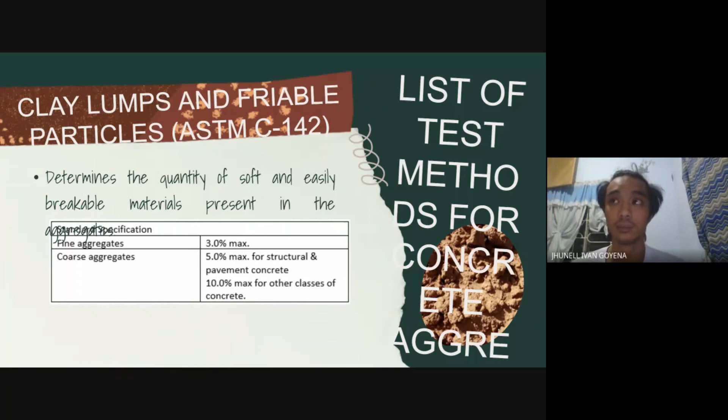For coarse aggregates, 5% max for structural pavement concrete and 10% for other classes of concrete. Similar to coarse aggregates, the clay particles are already filtered out or dropped at the next sieve, so basically the clay content gets used up, making it easier to avoid.

Abrasion loss measures the extent of degradation of coarse aggregates using the Los Angeles abrasion machine. Low abrasion loss manifests as structurally sound, tough, durable aggregates.

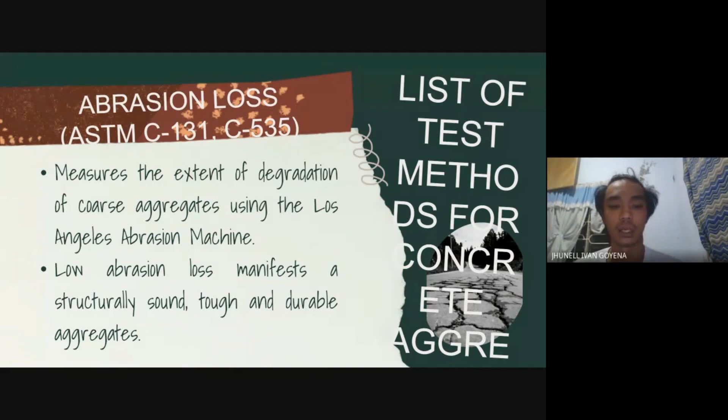Soundness loss estimates the soundness of aggregates when subjected to weathering action in concrete or other applications. Those cracks I mentioned earlier are also affected by weathering on concrete. One of the most common causes, where you'll see the biggest damage, is in snow or when temperatures drop below freezing point.

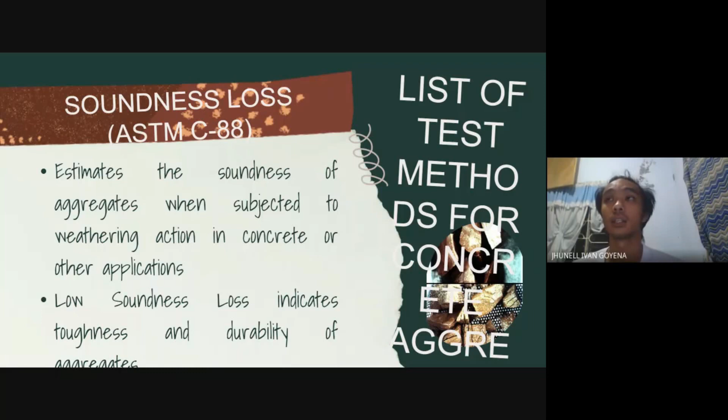Organic impurities. Determination of presence of injurious organic materials in fine aggregates used in cement, mortar, or concrete. It affects the hydration of cement, which results in low strength or low strength development of concrete.

It may contain decayed vegetation, humus, coal particles, and organic and industrial waste depending upon the source. Dito sa organic impurities, syempre hindi maiiwasan na merong, let's say, mga dahon or decayed na dahon, yung mga tuyong dahon or coal particles na masahalo doon sa cement mix mo.

So kung mayroong organic particles doon, syempre mag-iiba yung absorption ng tubig doon sa concrete mix mo. For example, pinakamagandang example is yung coal. Yung charcoal kasi is maganda siyang absorbent ng water, so kung yung water na yun, imbes na sa concrete siya mapupunta, isisihigop lang siya ng coal, parang hindi gaganda yung concrete mix mo and dun magsisimula yung iba't ibang damage.

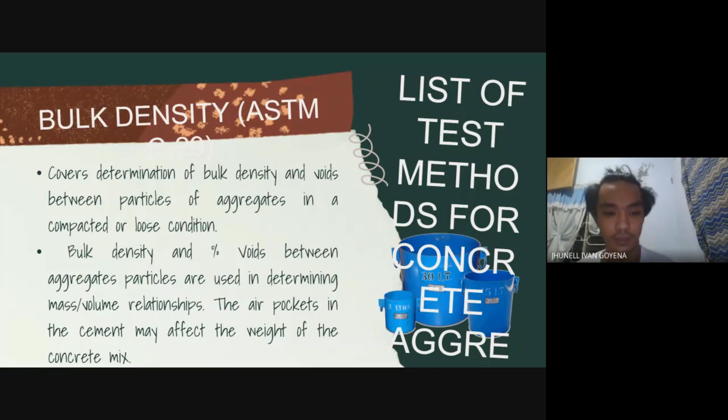So next, potential alkali reactivity. Test method for potential alkali silica reactive of aggregates. It evaluates the potential reactivity of siliceous aggregates with the alkalis in Portland cement.

Test method for potential alkali reactivity for aggregates, ASTM C1260. A means of detecting the potential aggregates intended for use of concrete undergoing...

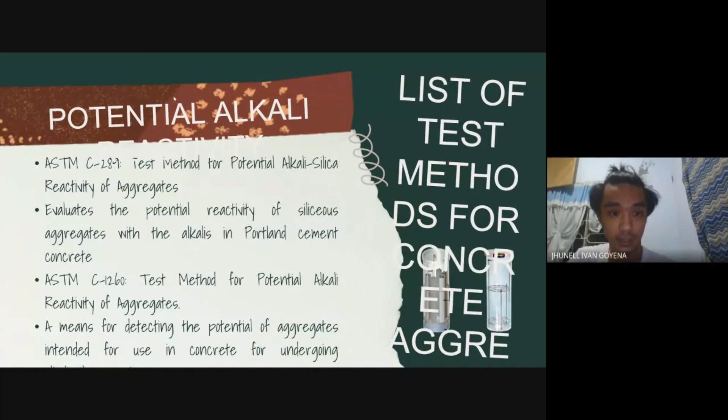Here are the standard specification for potential alkali reactivity. Aggregates is innocuous, so less than 0.1% at 16 days. Potentially reactive is 0.2% at 16 days.

Yung aggregates mo, kung mas mababa yung acidity niya, syempre mas hindi siya magiging harmful para doon sa concrete, at mas mababa yung damage na mangyayari sa kanya. Mas mababa yung damage na mangyayari sa kanya, syempre mas matagal siyang ma-deteriorate. So next...